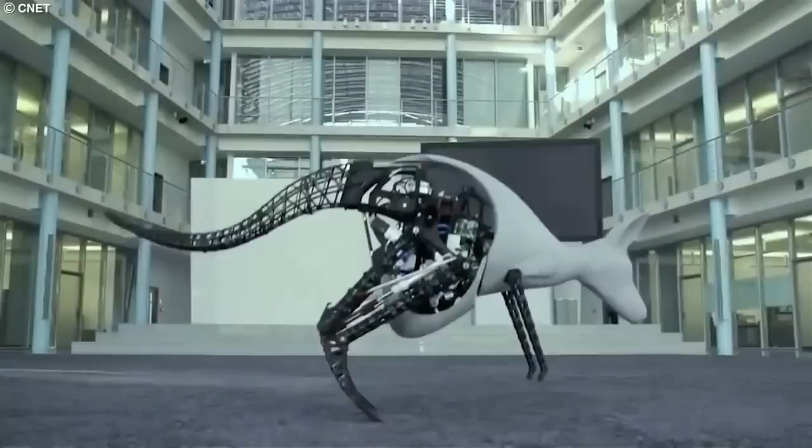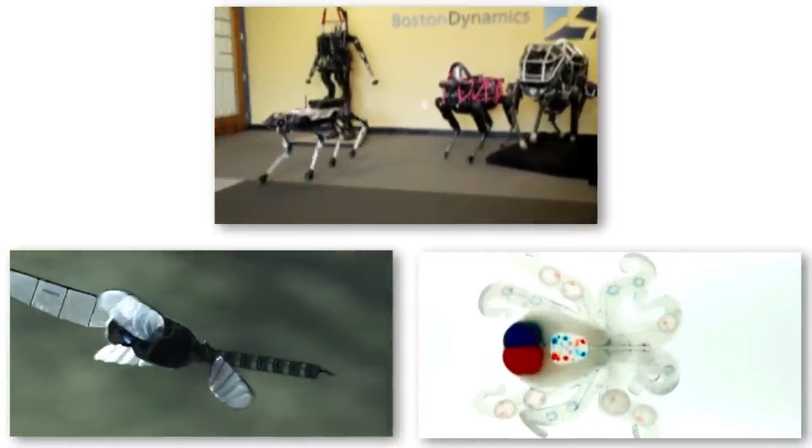This bionic wheelbot is not only able to exhibit unique movements, it's likewise able to adapt perfectly to just about any environment and traverse even the toughest of terrains. But it's this robotic spy crab that's fast revolutionizing how we study animal behaviors, as well as taking our understanding of these crustaceans to unprecedented levels.

In this video, we've detailed 20 amazing robot animals that will absolutely blow your mind.

Number 20: Robot Dolphin. Now, just imagine walking into SeaWorld and being greeted by not only live animals, but by a pod of incredibly realistic robotic dolphins, jumping and flipping through the air just like their real counterparts.

And while this may seem like a futuristic fantasy, the truth is, it could soon become a reality thanks to the incredible works of Edge Innovations. These robots are not only a substitute for their live counterparts, they're also a technological marvel and are already revolutionizing the way that we think about live animal shows and marine conservation.

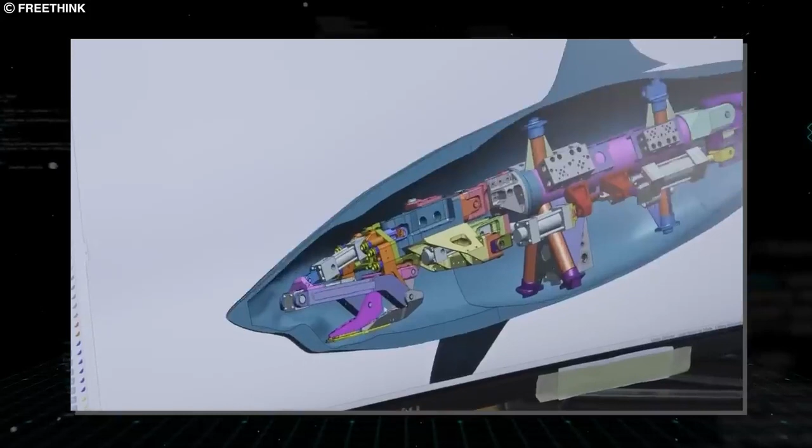Using their advanced AI, sensors, and programming, they're able to learn and adapt to their environment, interact with humans, and even respond to commands. The illusion of a live dolphin and the ability to interact with it.

These robotic dolphins from Edge Innovations are so advanced that they can mimic the behaviors and movements of real dolphins with stunning accuracy. And with over 3,000 live dolphins currently held in captivity for entertainment purposes, this company hopes that their robots will help to reduce the practice of keeping wild animals in captivity.

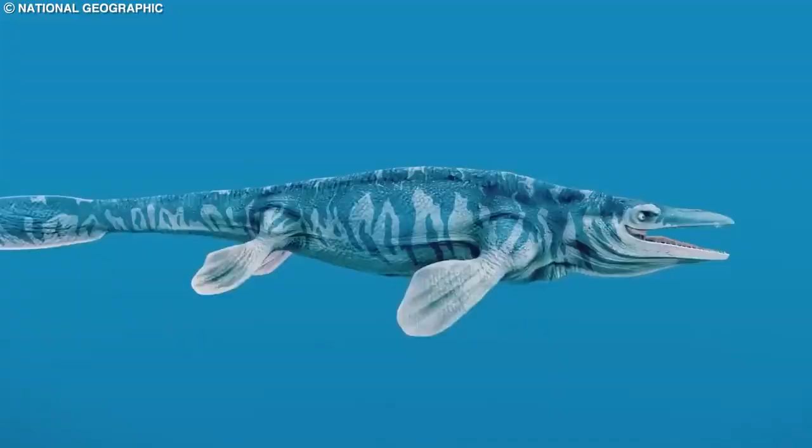In addition to these dolphins, the company has said that swimmers will likewise be able to dive with great robotic white sharks and even Jurassic-era reptiles from the sea from millions of years ago in the near future.

Number 19: Robotic biohybrid zebrafish. The idea of a robotic fish paving the way to an artificial heart may seem like science fiction, but in the world of cutting-edge medical research, anything can be possible.

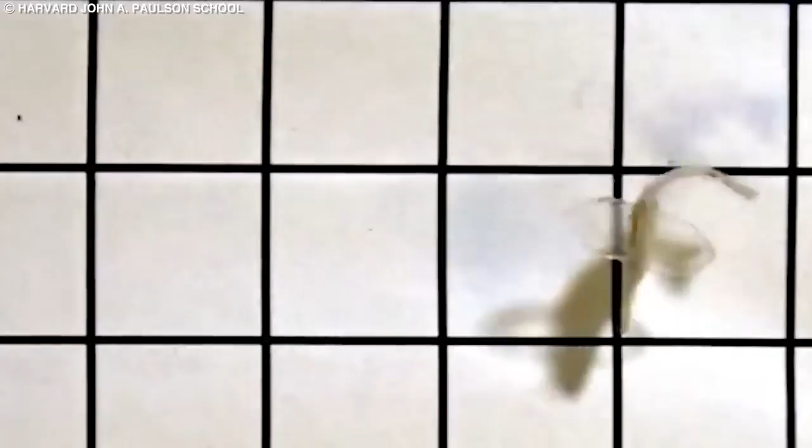A team of experts at Harvard is pushing the boundaries of what we thought was possible, turning to a surprising source of inspiration, that being the humble zebrafish. Fish have always been known for their agility and grace in the water, but it's the mechanics of their tail that has captured the attention of scientists.

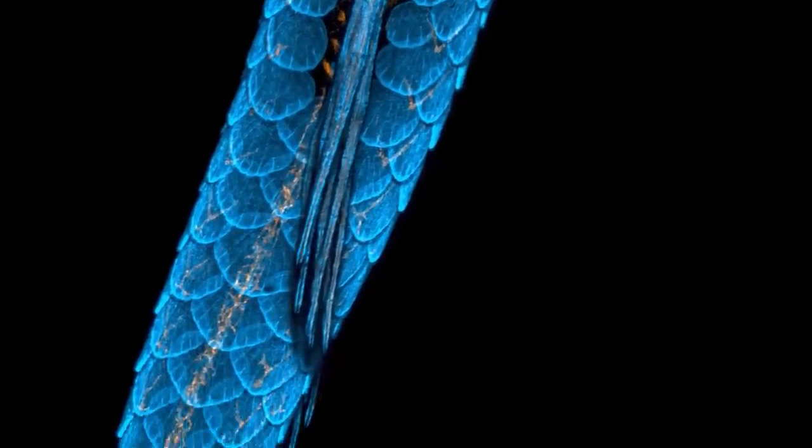By studying the way that fish move through the water, the researchers have discovered that there are some striking similarities between the way that fish swim and the way the human heart functions.

To put their theory to the test, the scientists have created a biohybrid zebrafish using a combination of paper, gelatin, and human cardiac cells. And remarkably, when these tiny robotic fish are then placed in a nutrient-rich liquid environment, they're able to swim continuously for over 100 days.

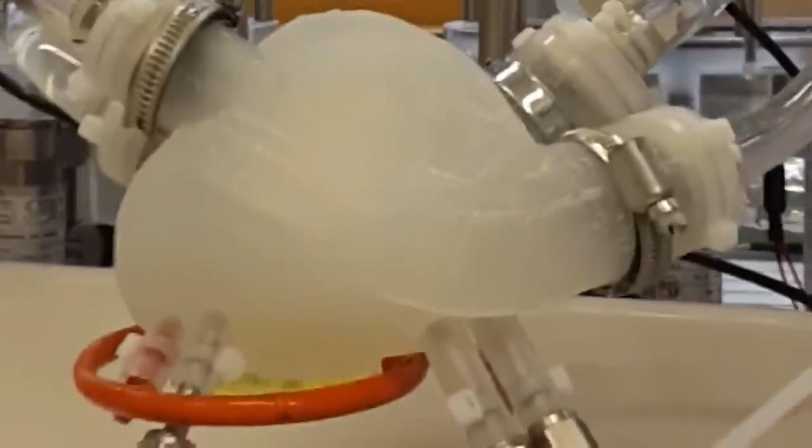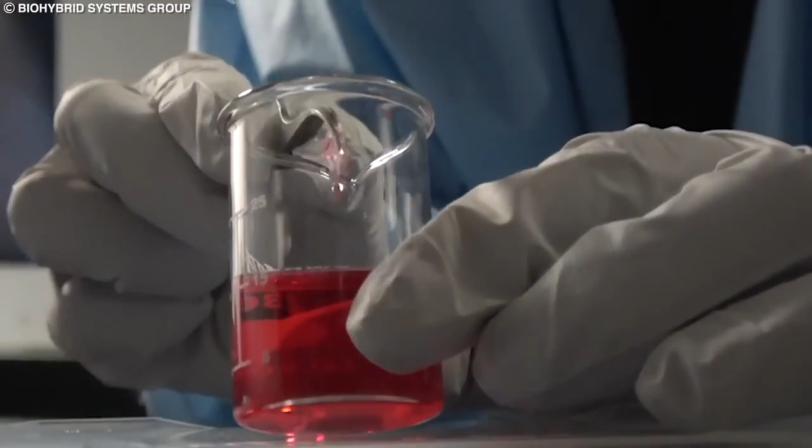While there's still much work to be done before an artificial heart becomes a reality, the research being conducted at Harvard has been widely considered a promising step forward. The biohybrid zebrafish is yet another instance of AI and robotics playing a crucial role in finding a lasting solution to a pertinent human problem.

Number 18: Crab Microbot. Nature's fondness for crabs has puzzled scientists for many years. While the reason behind it is still unknown, some experts speculate that the unique shape of crabs provides them with a wide range of benefits.

So, taking inspiration from nature and by the crab's unique features, an international team of scientists has developed tiny robots that move like crabs. These sub-millimeter robots are made from a material that can be programmed to remember its original shape and deform in response to light.

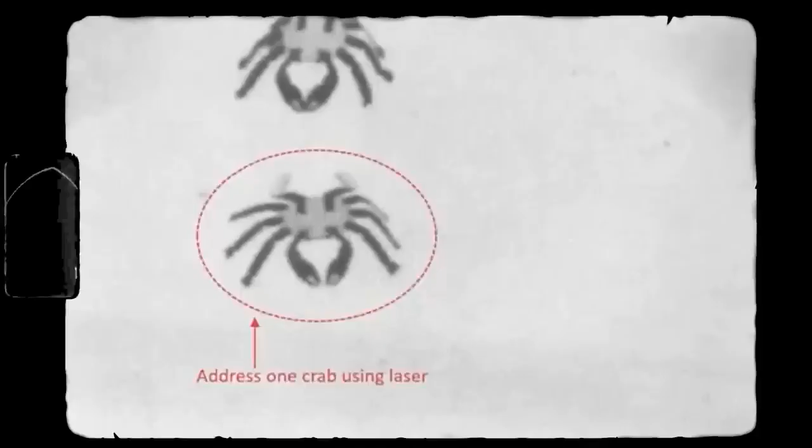By shining a laser on the robots, the material relaxes and then deforms, causing the robot to move in a crab-like motion. But these microbots are not only for show, they have the potential to revolutionize medicine with their ability to navigate through the body and deliver targeted treatments.

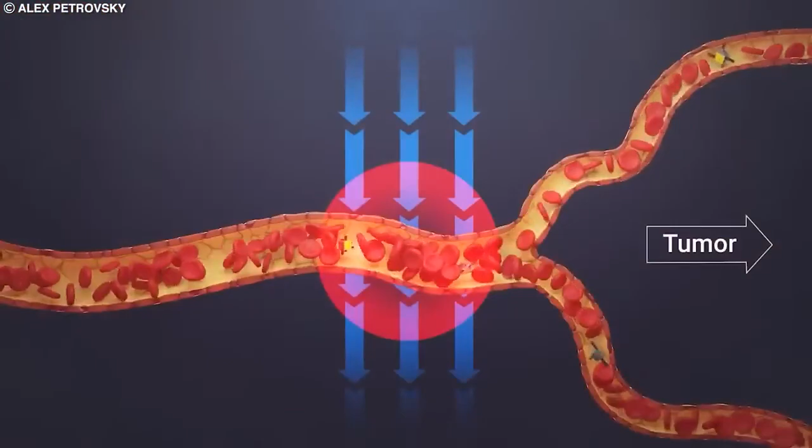Just imagine a swarm of tiny crab-like robots all working together to remove cancer cells or repair damaged tissues inside the body. This tiny crab microbot is fast revolutionizing the field of biomimicry, the practice of imitating nature to solve human problems, and the endless possibilities that come with studying and learning from the natural world.

Who knows what other secrets nature may have in store for us? The possibilities are endless, and the future is full of promise.

Number 17: Cyborg Ray. Meet the incredible cyborg creation, a stingray powered by a rat's heart, but designed to move like a real-life stingray. It's unlike anything else that you've ever seen before.

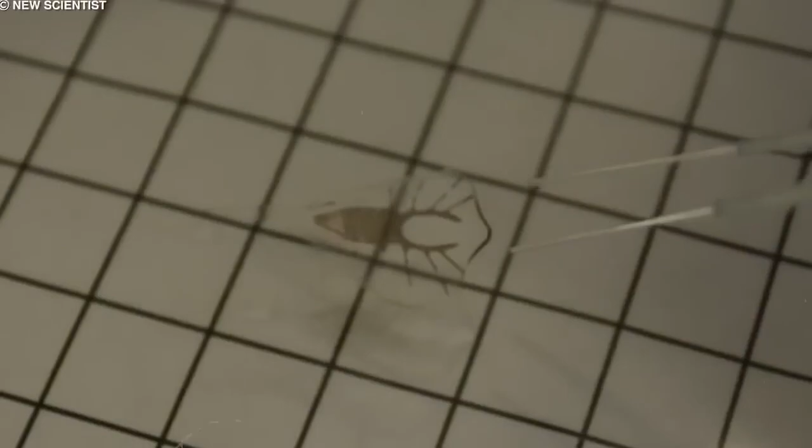This cutting-edge technology uses genetically engineered muscle cells that respond to light cues to help propel the stingray's body throughout the water, mimicking the movement of a real stingray.

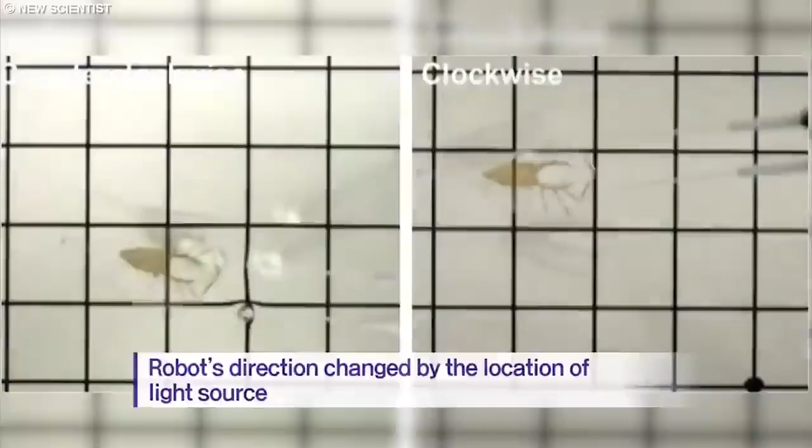The stingray's unique gold skeleton stores energy and moves the fins upward depending upon the pulses and frequency of the light show, giving its controller complete access over the direction and speed of the creature.

This cyborg creation has become yet another remarkable example of how technology can blend with biology in order to create something truly extraordinary. However, this ray is not only a technological feat, it also has the potential to revolutionize medical science.

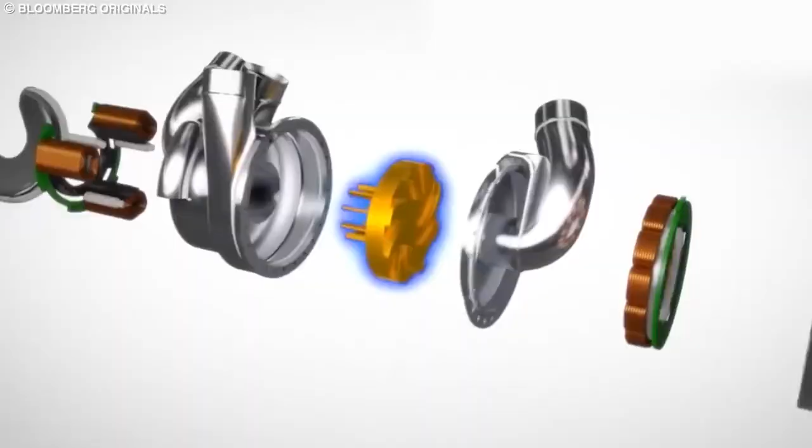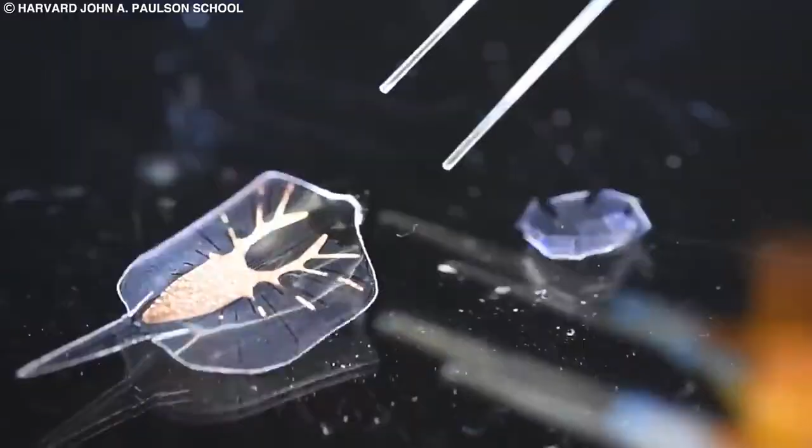By studying how heart muscles move in the stingray, scientists can learn more about how to create synthetic pumps for humans using a hybrid of organic and mechanical elements. This little stingray could be the key to making life-saving medical advancements, the likes of which we could never before imagine. The stingray is a biological life form in some ways, a machine in others. It cannot reproduce, but it's undoubtedly alive, perfectly balancing its organic and man-made matter in one.

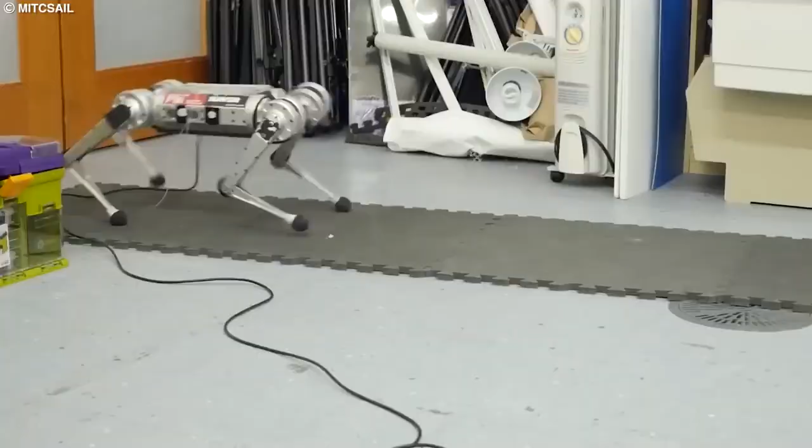Number 16, Mini Cheetah Robot. This is the newest addition to the MIT family, an incredible, agile, and versatile four-legged robot that can do backflips and run with ease.

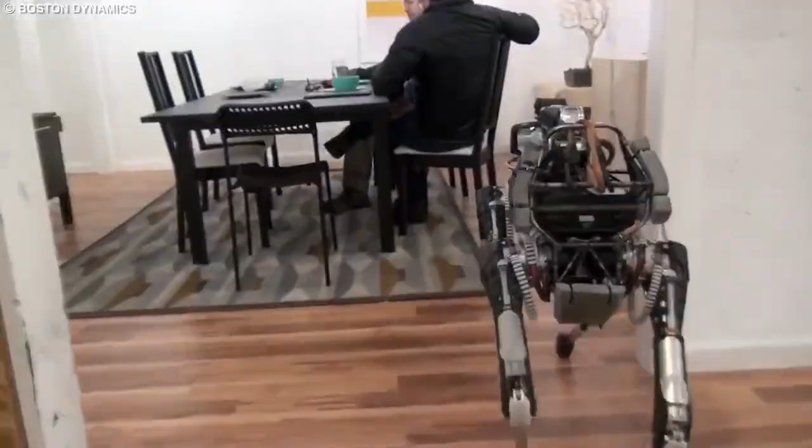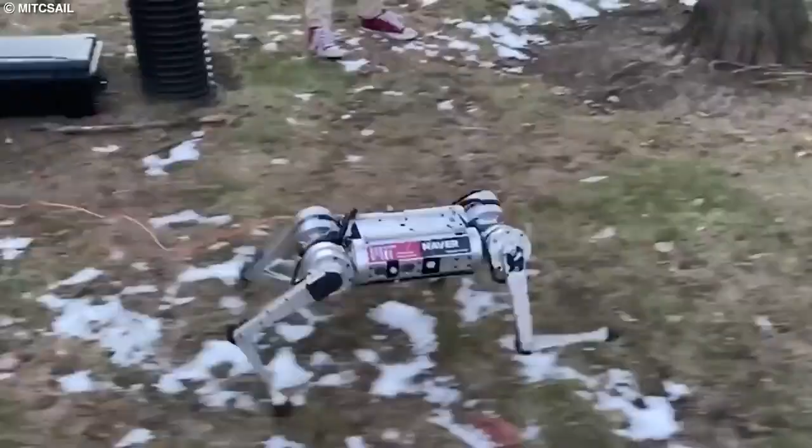While it may look similar to the company's famous robot dog Spot, this robot has been specifically designed for a unique research purpose and was developed in collaboration with DARPA. One of the key features of this robot is its robust frame and body, which are built to withstand rigorous testing and experimentation without the fear of damage or breaking. The powerful actuators allow researchers to test controllers and perform experiments with ease, making it an invaluable tool for studying movement and robotics.

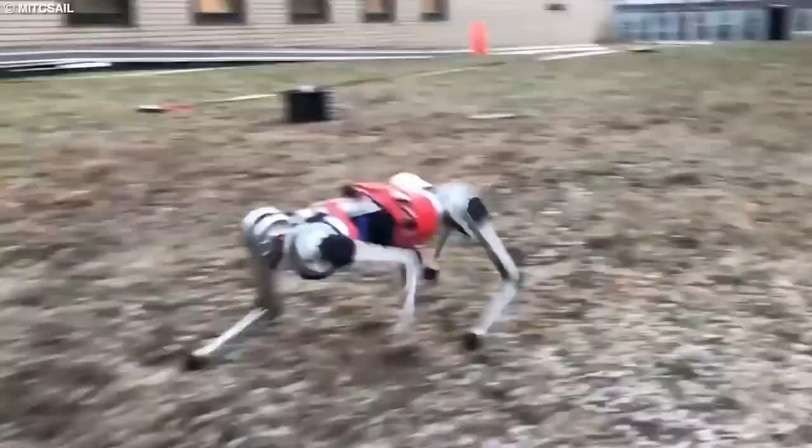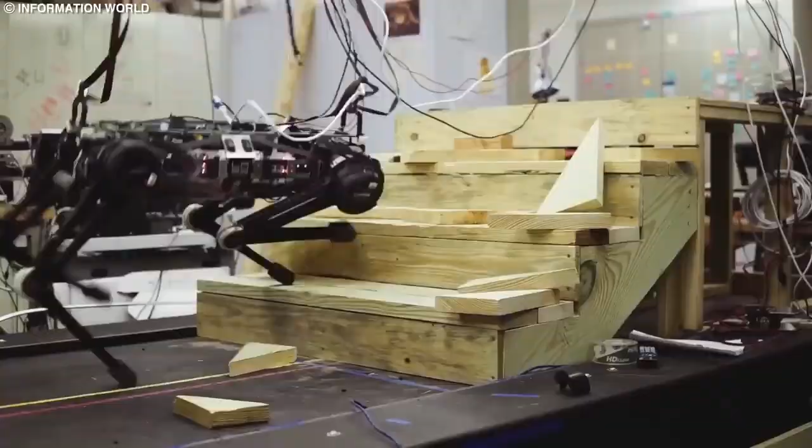What really sets this robot apart is its unparalleled strength and durability. It can navigate environments with ease and grace, whether it's running on grass or ice. Its movements are incredibly fluid and natural, which makes it a valuable asset for researchers studying locomotion and biomechanics. This robot is the perfect example of how technology and robotics can be used to advance our understanding of the world around us. With its impressive capabilities and versatility, it's sure to be a valuable tool for researchers and scientists for many years to come.

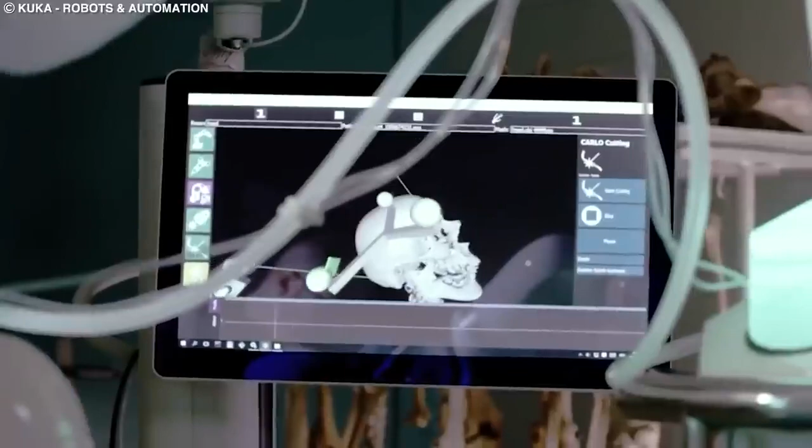Number 15, Magnetic Tentacle Robot. The idea of using machines to explore the human body without having to cut it open has always been an alluring one, captivating the imagination of scientists for decades. However, developing such technology has been a significant challenge, as the devices need to be small, flexible, and yet powerful enough to navigate through the complex structure of the body's internal organs.

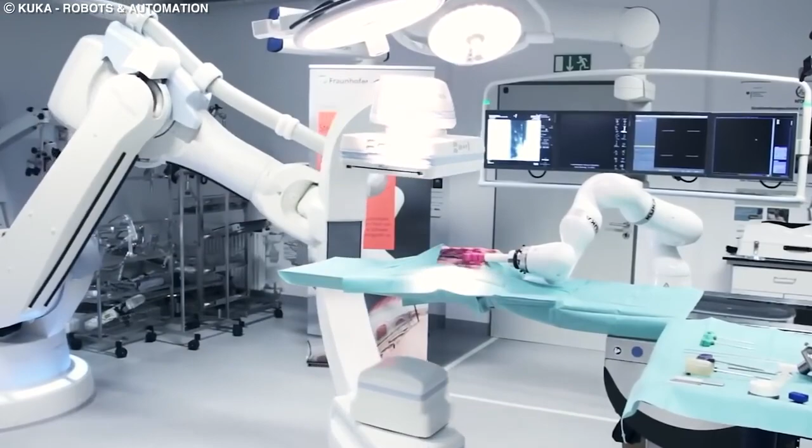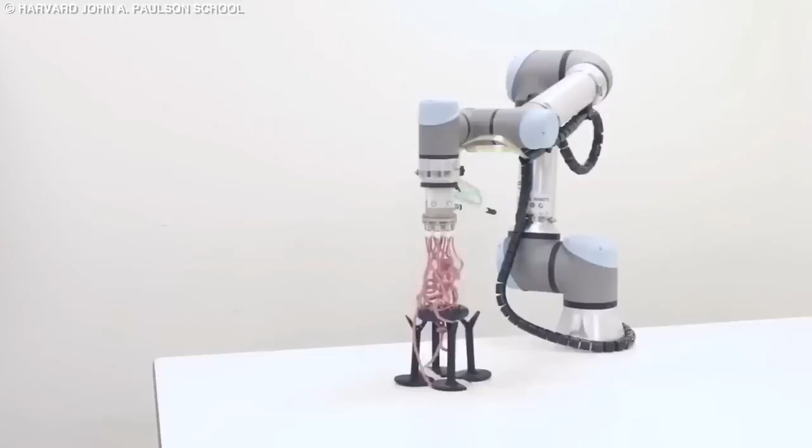To overcome these challenges of accessing the intricate internal organs of our body, especially the lungs, scientists from the University of Leeds have once again turned to nature for inspiration. This time, they've carefully examined how tentacled animals, such as the octopus, navigate narrow spaces, resulting in a groundbreaking robot called the Magnetic Tentacle Robot, which perfectly mimics the tentacles of these animals. This novel invention uses a rubbery elastomer that is flexible and maneuverable, with magnetic particles that can be controlled via an external magnetic controlling device.

This way, the robot can make its way deep into the lungs or any other body part without being manually manipulated by a surgeon. Once inside the body, the tentacle's movements are entirely autonomous, as it follows a predetermined plan to navigate through the lung's complex structure. The potential for this technology is vast, and it could revolutionize the field of medicine in the years to come.

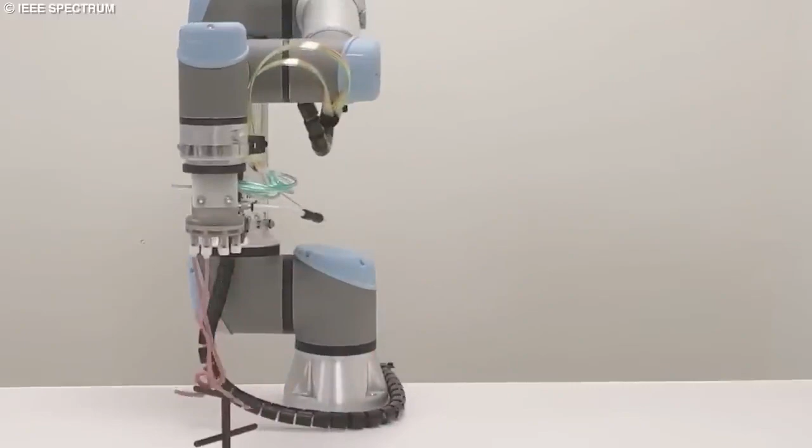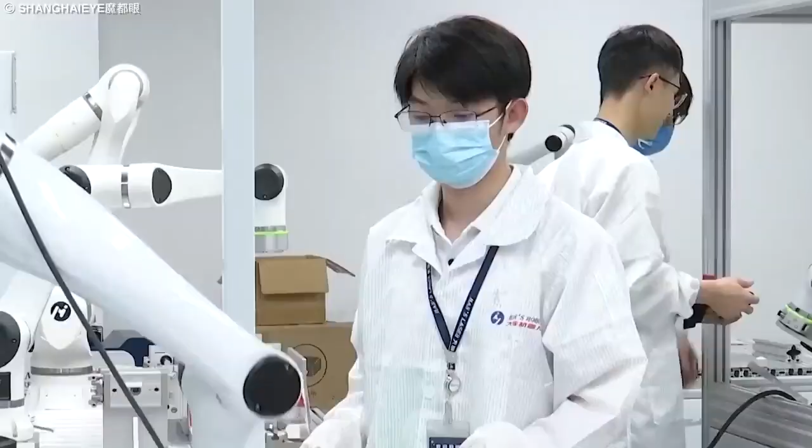Number 14, Shanghai Robotic Shark. This robotic shark was created by researchers at China's Aerospace Science and Industry Corporation, and it's a fascinating sight to behold. Since its debut at the Shanghai Haichang Ocean Park, visitors have been flocking to witness this incredible feat of engineering. The shark's lifelike movements and accurate depiction of a real shark's physical features have made it a must-see attraction for those interested in aquatic life.

Despite its impressive size of 4.7 meters, the robotic shark can move at a speed of 42 meters per minute, making it almost as fast as some of its biological counterparts. It's powered by a lithium battery, which allows it to swim, turn, float, and dive just like a real shark would, and the robot's mouth and gills can open and close, providing a realistic simulation of a real shark's breathing and feeding processes. The researchers behind the project have plans to develop more robotic aquatic animals based on feedback from the public and experts.

These robotic aquatic animals will be used for hydrological survey, environmental inspection, and underwater photography, giving researchers a unique perspective on underwater life. As it stands, one undeniable fact is that as more of these biomimetic robot fish are developed and refined, they'll greatly revolutionize how we study and understand underwater life.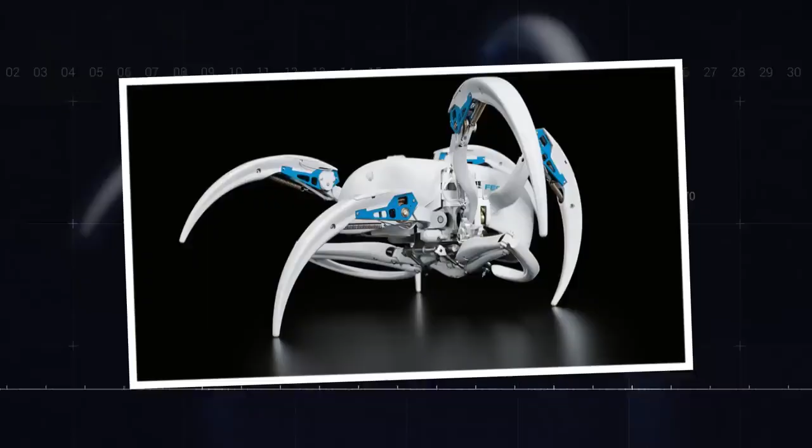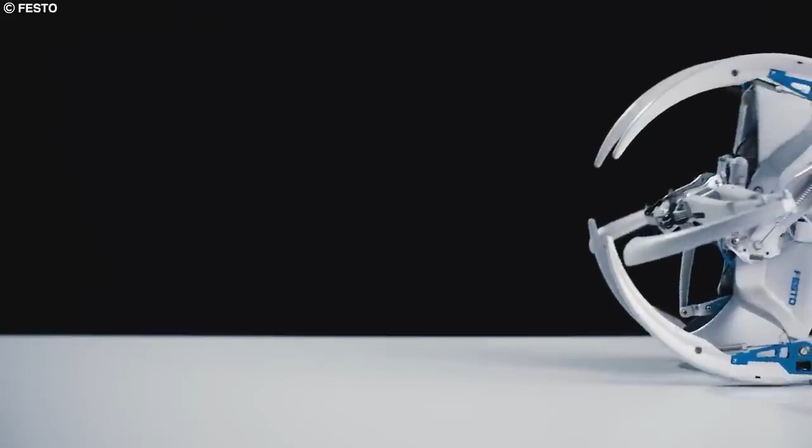Number 13, Bionic Wheelbot. The Bionic Wheelbot is a mind-blowing marvel of engineering. This unique robot takes inspiration from the incredible flick-flack spider, known for its unique cartwheeling movements. This movement pattern allows it to move quickly and efficiently across varied terrain. By mimicking this movement, the Bionic Wheelbot is able to adapt to its environment in such a way that no other robot has been able to before.

Festo, the company behind the Bionic Wheelbot, is no stranger to innovative design. They have long been at the forefront of bionic learning, exploring new ways to incorporate the natural world into their designs. The Bionic Wheelbot is just the latest in a long line of incredible creations.

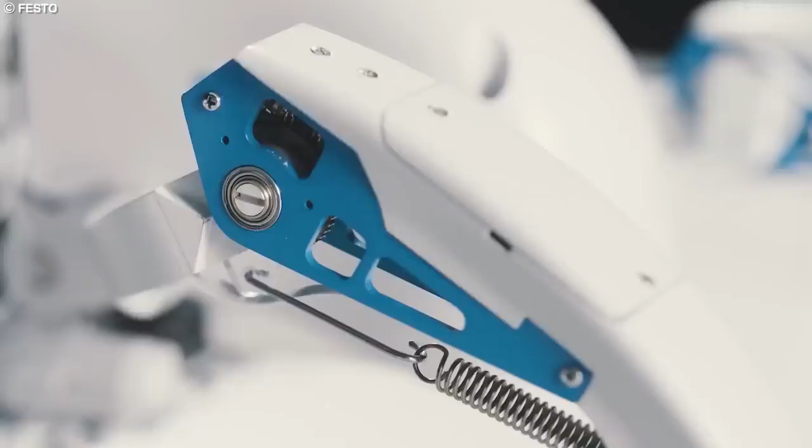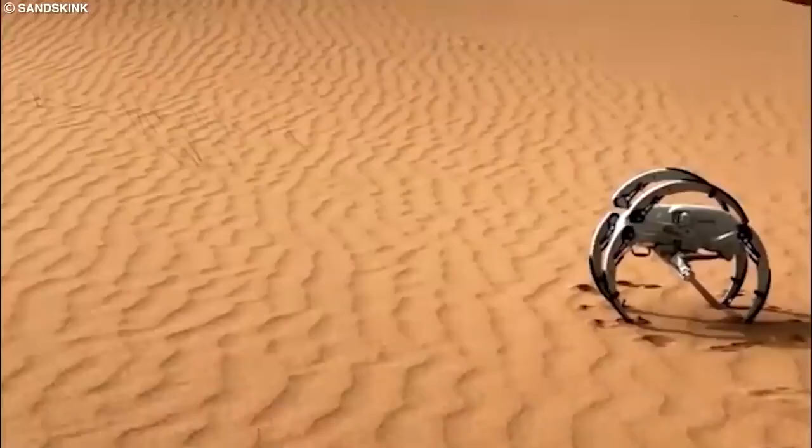One of the most impressive things about the Bionic Wheelbot is its ability to switch seamlessly between rolling and walking. This makes it incredibly versatile and able to navigate everything from smooth and level surfaces to rocky and uneven terrain. Because it can move with such ease, it can also go places that many other robots simply cannot.

The Bionic Wheelbot's design is incredibly resilient. It features a sturdy frame and advanced sensors, which allow it to withstand even the most challenging climbs, making it an ideal choice for exploring rugged environments like mountains and deserts.

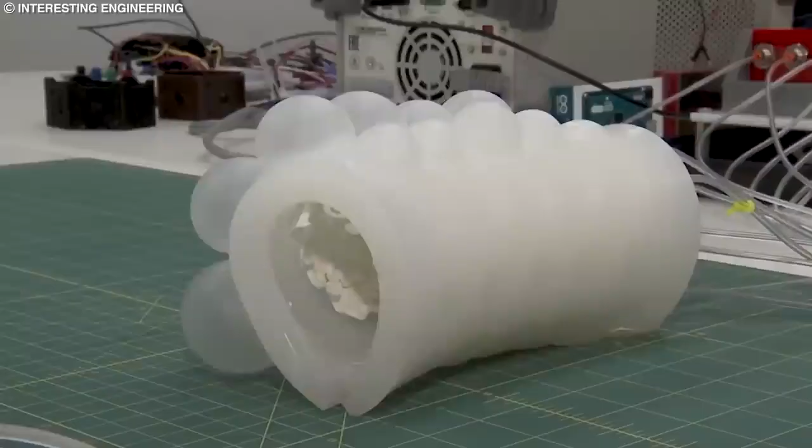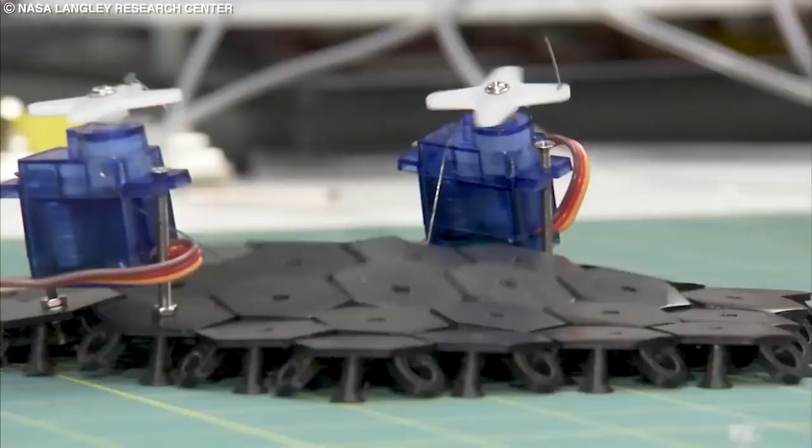Number 12: Soft Octobot. Robotic cephalopods are the future of robotics and can potentially revolutionize the field. Although the first Octobot was developed in 2016, the technology behind robotic cephalopods has now undergone great advancements. These robots can now not only navigate tight spaces, but also change their shape and configuration as needed.

Just like a real octopus, their soft and boneless bodies allow them to move and contort in ways that rigid animals cannot. They can squeeze through small openings, wrap themselves around objects, and even change their skin color and texture to blend in with their surroundings.

The potential applications for soft robots are numerous. For example, a soft robot could navigate through rubble and debris in search and rescue operations to locate survivors. They could also explore underwater environments where hard-bodied robots might be too bulky and inflexible to maneuver effectively.

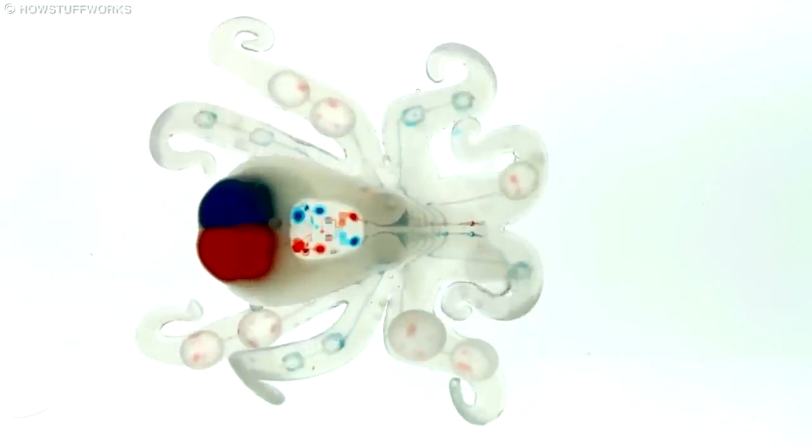The underlying technology behind the improved versions of soft robots is likewise fascinating. The microfluidic logic circuit inside the robot is a breakthrough in fluid dynamics. This circuit works like a circuit board, directing pressure to different parts of the robot as needed. The chemical reaction inside the robot that changes hydrogen peroxide into gas is another technological marvel.

As scientists continue to develop and refine this technology, we may see more and more applications for soft robots in various fields, from medicine to construction, and perhaps even space exploration.

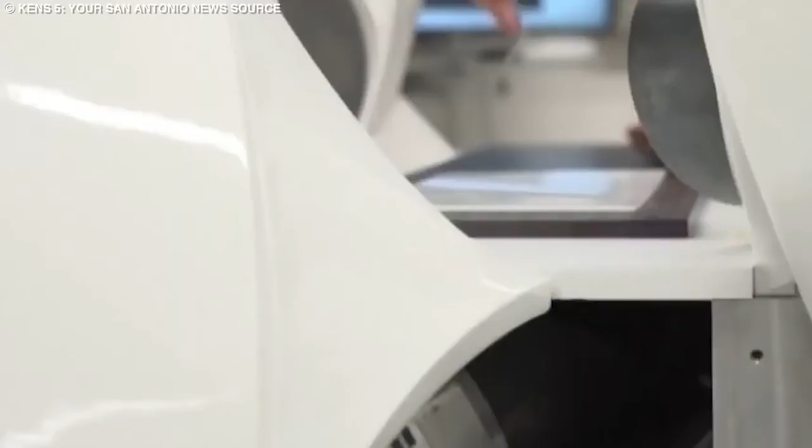Number 11: Robotic Millipede. This tiny robotic millipede, created by researchers in Hong Kong, is a revolutionary innovation that is set to change the way drugs are administered into the body.

Unlike traditional methods that can be invasive and painful, this little soft caterpillar-like robot can navigate through the body with ease and precision. The robot's design is based on the leg structures of hundreds of ground animals, and its legs have a perfect length and gap ratio of 1:1.

This design allows the robot to experience 40 times less friction than a limbless robot in both wet and dry environments. This also makes it extremely efficient and allows it to move through the body effortlessly.

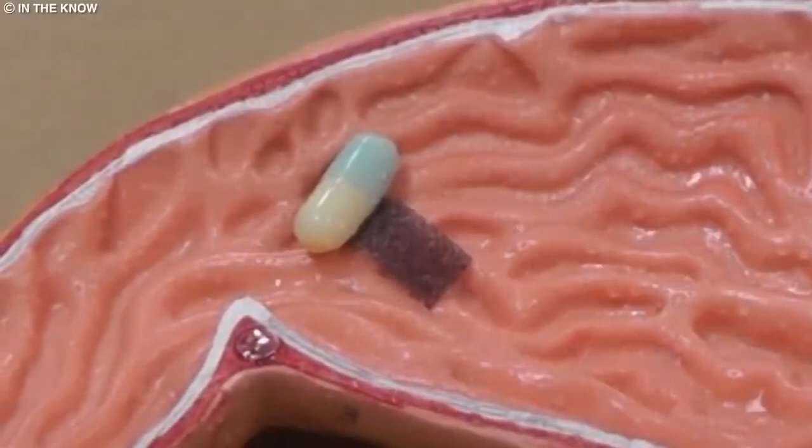What's more, this robot can be remotely controlled using electromagnetic force, meaning doctors can guide it to specific locations within the body, such as a tumor, and administer drugs directly to the affected area.

This not only makes drug administration more precise, but also reduces the risk of side effects associated with traditional methods. While the thought of a robot crawling around in your body may seem a bit unsettling, the benefits of this innovation are hard to ignore.

The robot millipede can revitalize drug administration, making it more efficient, precise, and less invasive.

Number 10: Robot Dragonfly. Inspired by the complex flight capabilities of dragonflies, this small ultralight UAV, developed by Festo, is far more advanced than your usual drone.

While most drones can only fly in one direction, the Dragonfly robot is capable of flying in any direction, even backwards. It also has incredible turning acceleration as well as hover and gliding capabilities, but what's even more stellar is that it can achieve all of this without having to beat its wings.

The Dragonfly robot from Festo is likewise the first aircraft to combine the flight capabilities of a helicopter, a plane, and a glider all in one.

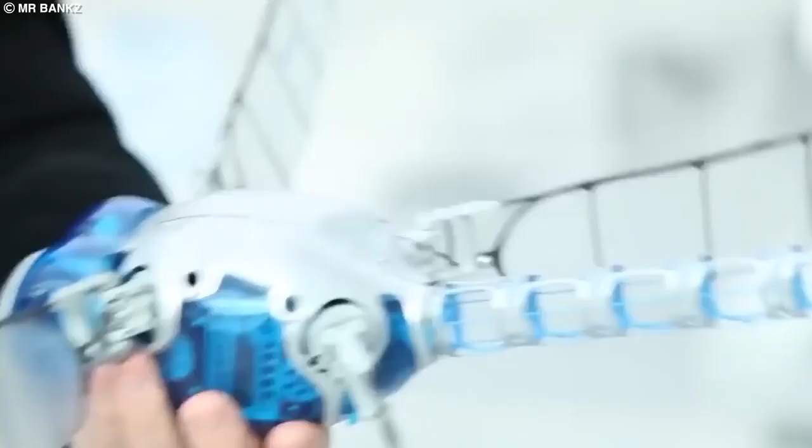The company hopes that by better understanding the flight strategies of dragonflies, they can apply these principles to solve many engineering problems within the industrial world.

One of the most impressive features of this amazing robot animal is its real-time communication abilities. It's remote-controlled and is capable of continuously exchanging information and evaluating multiple sensor inputs to identify complex events and critical states. This level of communication and evaluation is something that has never been seen before in the world of drones.

This robot is a testament to Festo's commitment to creating and innovating in equal measure, and Festo is sure to continue pushing the boundaries of what is possible with their Dragonfly-inspired technology.

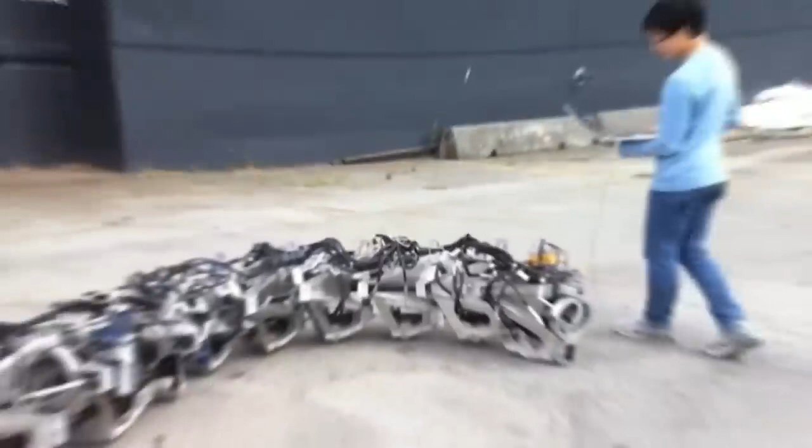Number 9: Spacebok. Dogs may have paved the way for space exploration, but now their robotic counterparts are taking center stage. While we've sent countless machines into space, from probes to rovers, the development of animal-inspired robots offers a unique opportunity to explore other worlds more efficiently and safely than ever before.

One such robot is the quadrupedal Spacebok, created by a team of students from ETH Zurich and ZHAW Zurich. Modeled after the movements of animals on Earth, the Spacebok is designed to use dynamic gaits, which allow all four of its limbs to leave the ground, making it better suited to navigate low-gravity environments like the Moon or Mars.

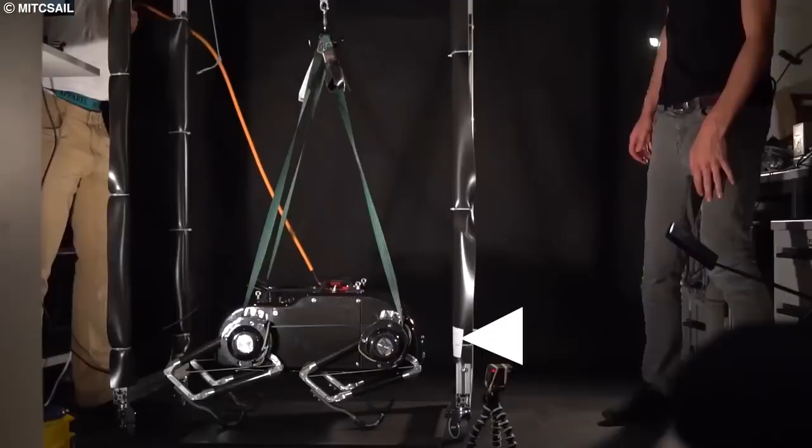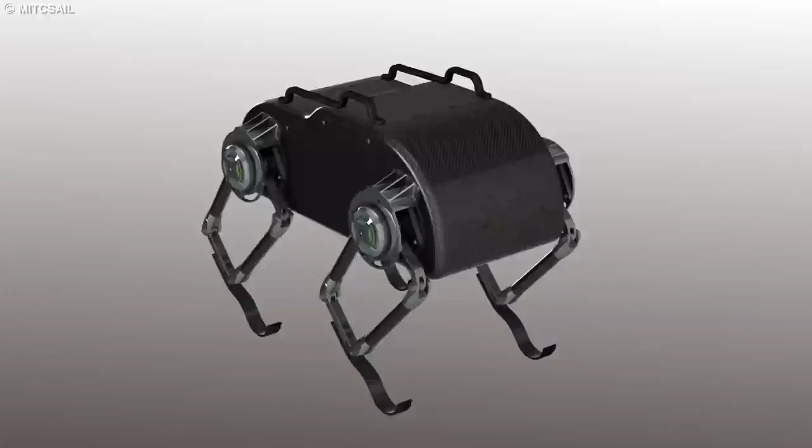Of course, designing and programming such a robot is no easy feat. Engineers had to take into account not only the unique challenges of space exploration, but also the intricacies of animal movement. It would not be until recently that the technology existed to replicate these dynamic gaits in robots, making Spacebok's development a groundbreaking achievement in the field of robotics.

As we look to the future of space exploration, robots like the Spacebok may become an essential tool in our efforts to explore and understand the universe. Spacebok represents the next generation of space exploration and a new era of scientific discovery.

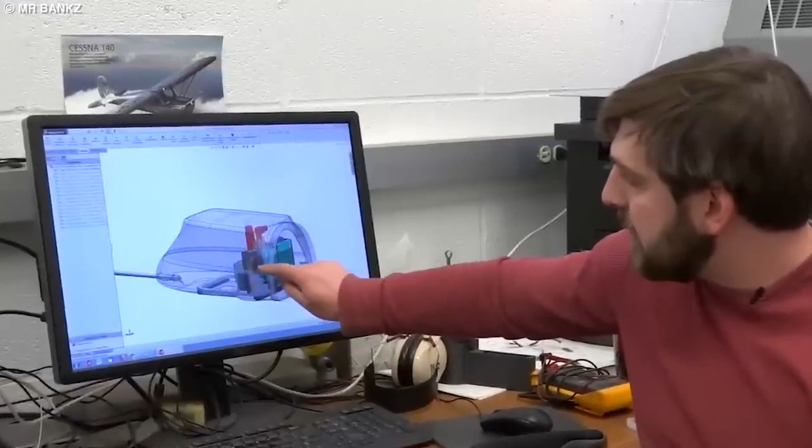Number 8. Spider Necrobots. Scientists at Rice University have taken robotics to a whole new level by using dead spiders as the basis for a new type of robot gripper. While the concept may seem a bit creepy, their process of creating these robots is actually fascinating.

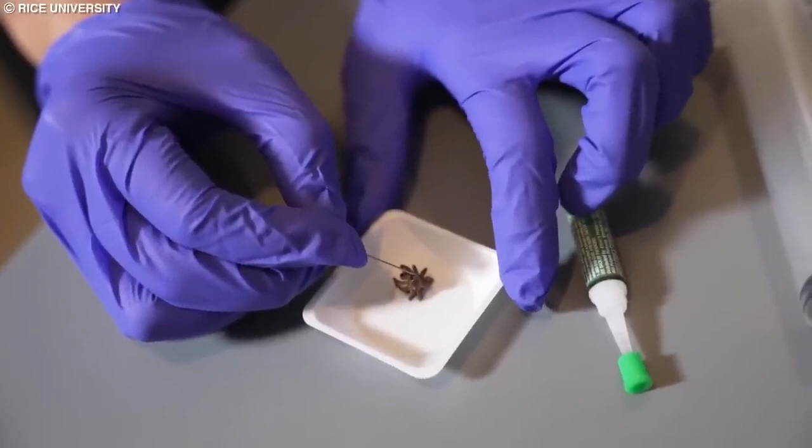By using the natural hydraulic system found in living spiders, the researchers were able to create a unique and efficient way to manipulate objects. The team inserted a syringe into the spider's body cavity and then injected it with a small amount of air, which created a new hydraulic system, allowing the legs to extend and contract. This process gave the dead spider a second life, albeit in robotic form, and the resulting robot grippers could grasp fragile objects with a surprising level of dexterity.

The researchers envision a range of applications for their necrobotic grippers, which includes the collection and transport of biological samples from remote or dangerous areas. The team believes that the natural gripping ability of spiders, combined with the unique hydraulic system they've created, makes these robots ideal for handling delicate materials.

Overall, this robotic creation is yet another demonstration of the incredible potential of biomimicry in robots, and also highlights the fascinating ways in which scientists are pushing boundaries in this interesting field.

Number 7. Robot Eel. The robotic eel has been described as a technology that's ahead of its time by many experts. This robot is designed to perfectly navigate through the most treacherous and contaminated of waters. Its sleek and streamlined body is capable of moving effortlessly through currents, propelled by a powerful yet silent motor.

Equipped with an array of sensors and testing equipment, the robotic eel is capable of analyzing even the smallest water sections to detect sources of pollution. Its sophisticated technology can pick up on the most minute changes in water quality, enabling it to pinpoint the exact location of contaminants. The development of this groundbreaking technology was the result of the collaboration of a diverse group of experts, which included engineers, biologists, and chemists.

Together, they worked tirelessly to create a robot that could contribute to environmental conservation efforts and bring about positive change in the world. The robot can be controlled remotely, allowing operators to direct its movements and ensure that it reaches its target destination. Alternatively, the robotic eel can operate autonomously, freely exploring the waterways and sending data back in real time.

The robotic eel is also incredibly environmentally friendly and does not contribute to pollution in any kind of way. The robot now represents a significant step forward in the fight against water pollution on a global scale.

Number 6. Robotic Spy Crab. As the sun rises over the pristine beaches of Christmas Island, the spy crab mimics the behavior of its crab counterparts. At times, the spy crab must navigate treacherous terrain, dodging vehicles and other obstacles, as it plays a crab version of the classic video game Frogger, leaving us all submerged in the extraordinary world of these fascinating creatures.

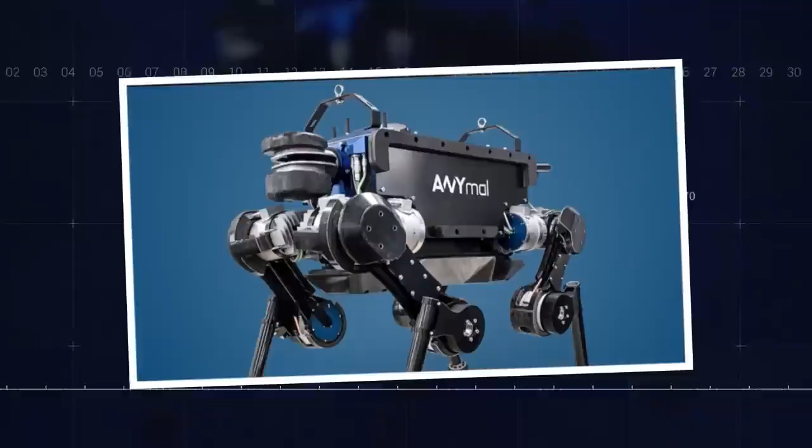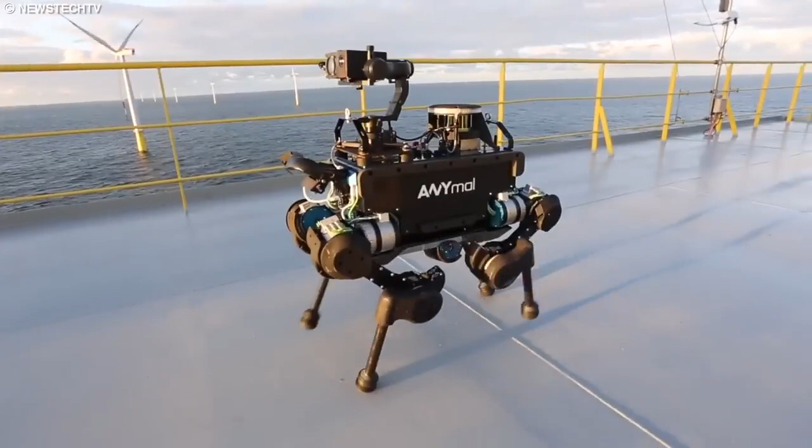Number 5. ANYmal. In 2009, a group of brilliant engineers at the Robotic Systems Lab of ETH Zurich embarked upon a monumental task, creating a four-legged robot that could traverse harsh environments without human intervention. Fast forward to the present day, and the result of their tireless efforts is awe-inspiring. It's the ANYmal, a robot that has surpassed all expectation.

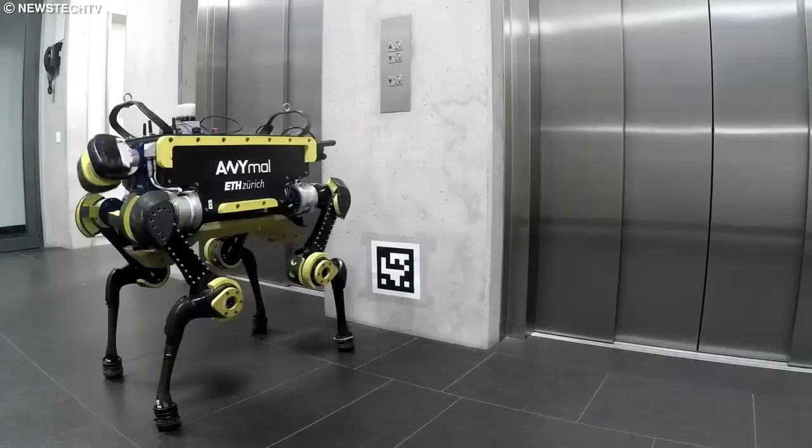With a sleek design and an impressive skill set, ANYmal is capable of running at breakneck speeds, conquering steep inclines, and even pressing elevator buttons with ease. But what really sets it apart from other robots is its advanced sensory system. Equipped with laser sensors and cameras, the robot can continuously create a highly detailed map of its surroundings, which allows it to carefully navigate through even the most treacherous of terrain.

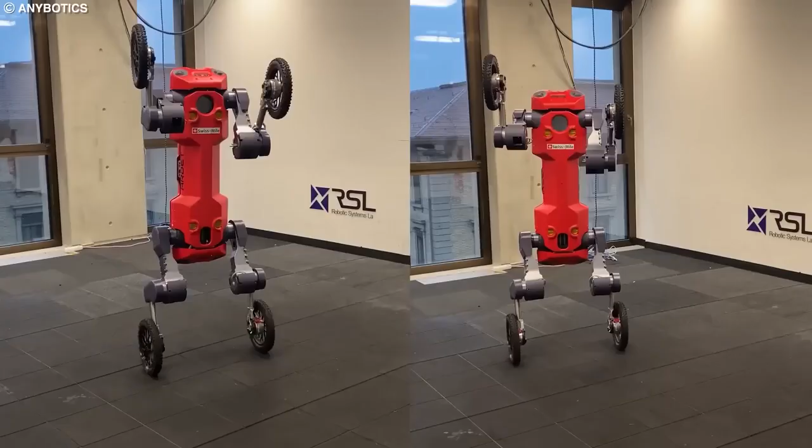Despite weighing in at around 30 kilograms, ANYmal is an incredibly strong machine that can carry a payload of up to 10 kilograms with ease. What's more, on a single battery charge, this remarkable robot can run for an impressive 2 hours.

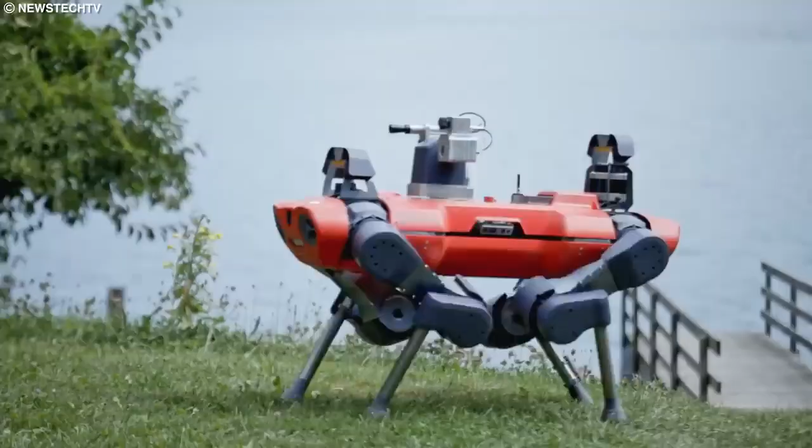Now, it's no wonder that ANYmal has attracted the attention of the world, with the ETH spin-off ANYbotics distributing and further developing this incredible piece of technology. ANYmal is undoubtedly a true marvel of modern engineering, paving the way for a new generation of autonomous robots that can handle even the toughest of challenges imaginable.

Number 4. BionicKangaroo. Festo, the renowned robotics company, never fails to amaze anyone with their animal-inspired creations.

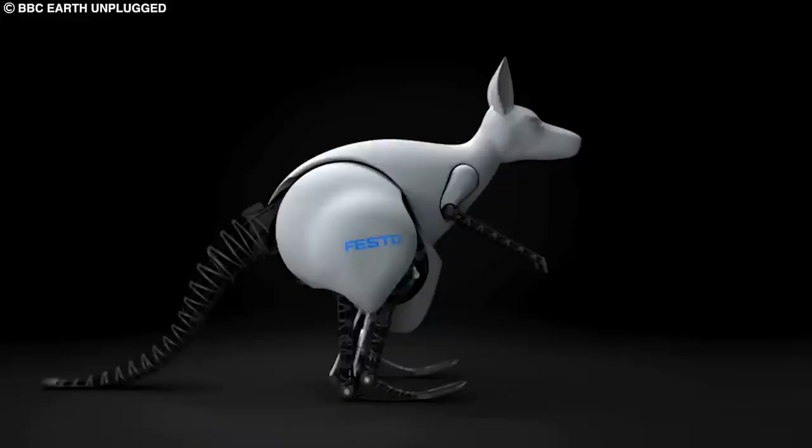The latest addition to the portfolio is the incredible BionicKangaroo, an engineering marvel in every sense of the word. Taking inspiration from the kangaroo's jumping mechanisms, Festo has recreated the animal's unusually long back legs, allowing it to increase its speed without consuming more energy.

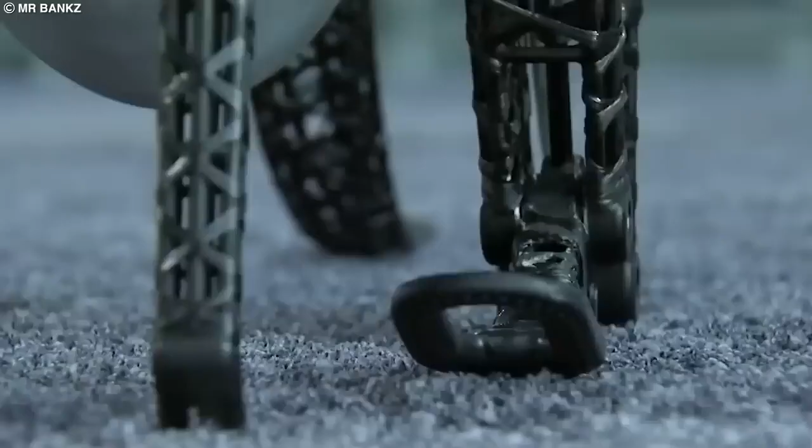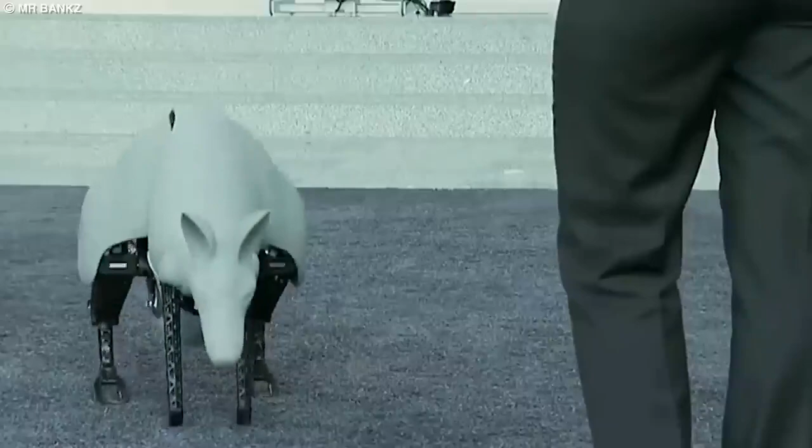In the world of robotics, energy consumption is a major concern. However, with the BionicKangaroo, Festo has found a way to use the power generated by the recreated back legs, which can be recovered, stored, and retrieved. This technology has immense potential in industrial automation, where knowledge about energy recovery and storage plays a massive role. With its ability to generate, store, renew, and regenerate energy, the BionicKangaroo represents a significant breakthrough in robotics and automation.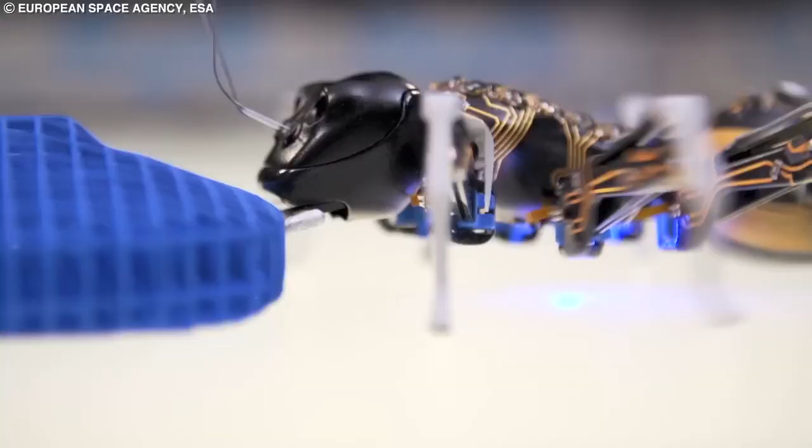Number 3. Bionic Ants. Imagine a world where robotic ants scurry about factories, carrying out tasks with incredible efficiency and precision. These mechanical insects are not only impressive in their ability to communicate and cooperate like their natural counterparts, but they also have an eye for detail and the big picture.

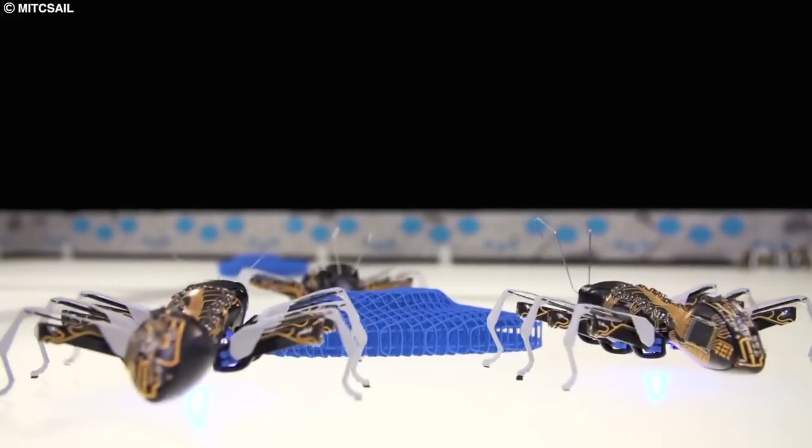Each robotic ant has been designed to mimic the delicate anatomy of a real ant, but with added technological capabilities. The engineers at Festo have incorporated the cooperative behavior of these creatures into their robotic counterparts, creating a world where these incredible little creatures work together seamlessly.

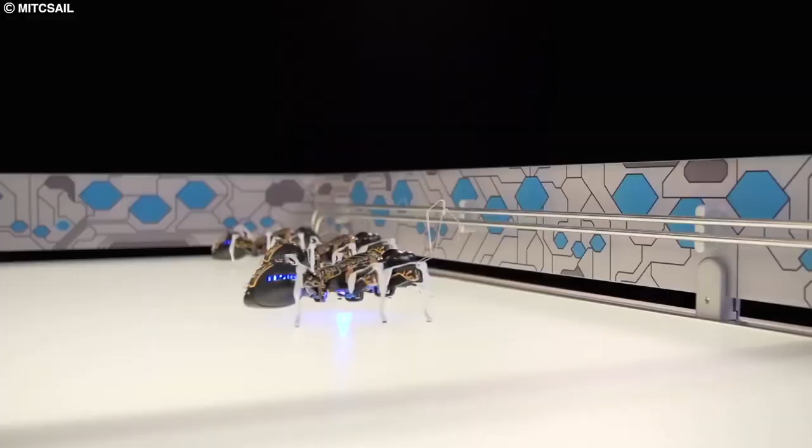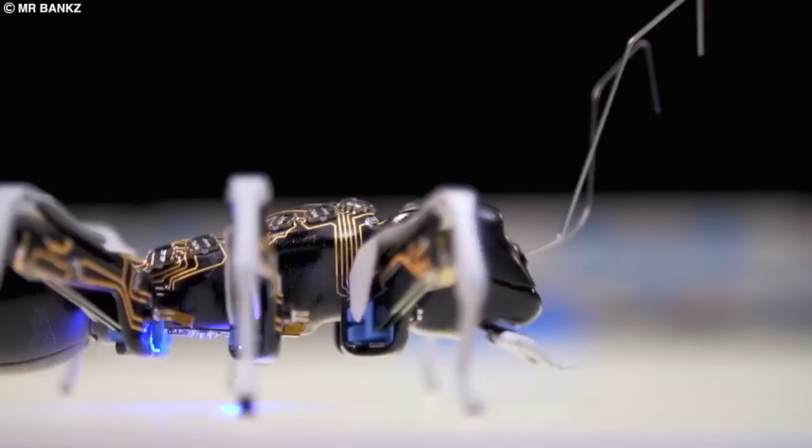Using complex control algorithms, the robotic ants communicate with each other, coordinate their actions and movements, and make autonomous decisions that are always subordinate to the common objective of solving the task at hand. They follow clear rules and guidelines, just like real ants do in their colonies, and the implications of this technological breakthrough are immense.

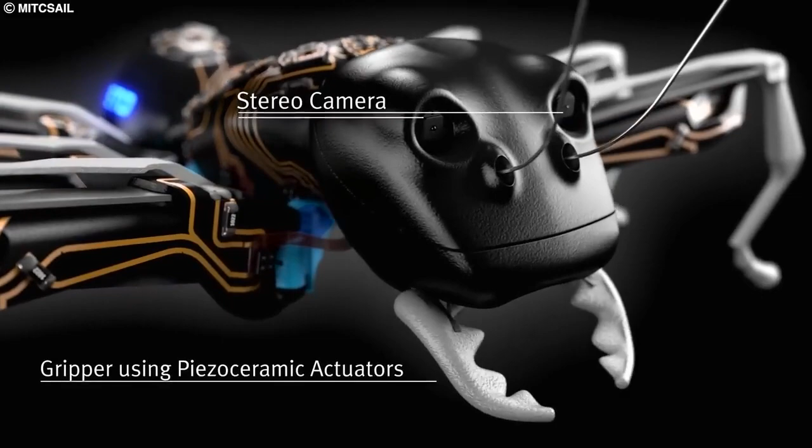Factories of the future could benefit greatly from the efficiency and coordination that robotic ants provide. These tiny machines could be used to carry out complex manufacturing processes, navigate difficult terrain, or even be deployed in search and rescue missions. As we continue to study and develop these robotic ants, we may discover even more ways to harness their incredible abilities. And who knows, we may one day see entire armies of robotic ants working together to solve the world's most pressing issues.

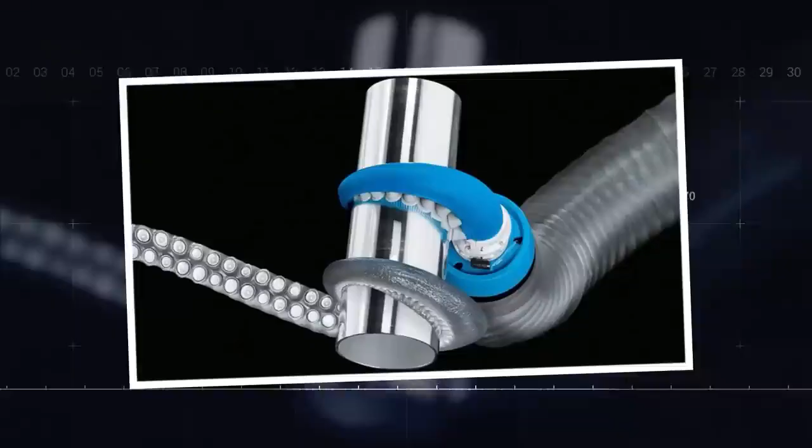Number 2. Octophant. This bionic motion robot is yet another groundbreaking bionic concept created by Festo. Drawing inspiration from the flexibility and dexterity of an elephant's trunk and an octopus's tentacles, this lightweight pneumatic robot boasts an impressive 12 degrees of freedom, allowing it to move in ways that were previously impossible for a robot to do.

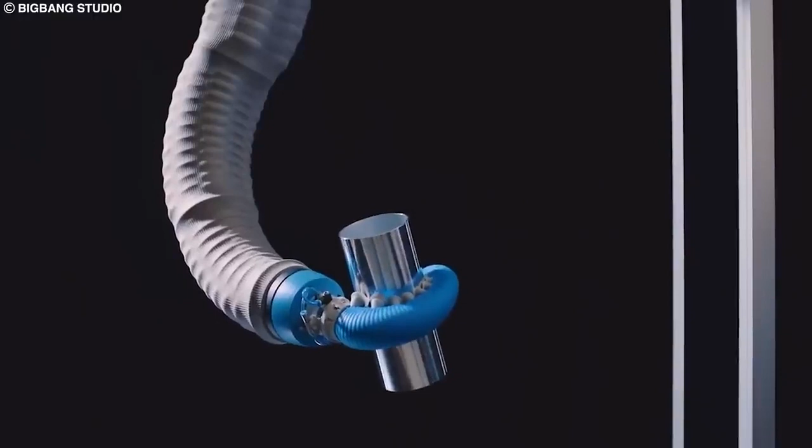This robot is not only agile and powerful, it also has the ability to carry a payload of up to 3 kilograms. Its innovative fiber technology, inspired by the muscle fibers found in an octopus's tentacles, provides the robot with a skin that is both strong and flexible.

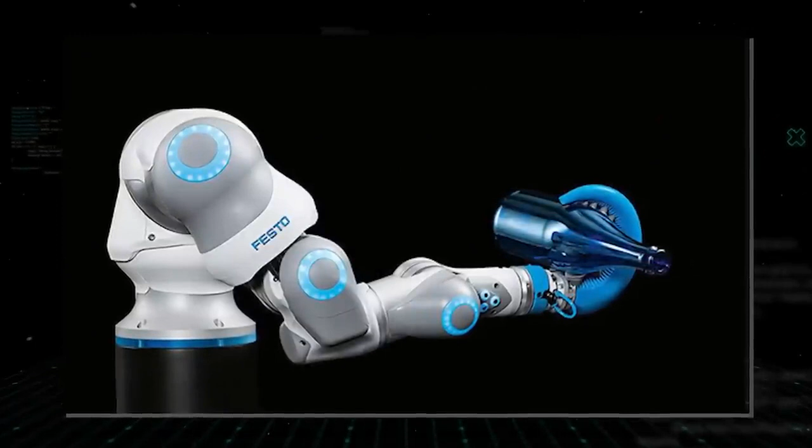This also means the robot can exploit the full power potential of its kinematics, moving in 3 different directions simultaneously with ease. Just imagine the possibility of having such a robot in your home or workplace. With its flexible and nimble movements, the bionic motion robot could assist with tasks such as cleaning hard-to-reach areas, picking up and carrying objects, and even performing delicate surgery.

Its lightweight design also means that it's safe to work alongside humans, making it an ideal candidate for collaborative efforts in industries such as manufacturing and logistics. This robot is sure to be a game changer in the world of robotics.

Number 1. Chip, the mini robot dog. Meet Chip, the mini robot dog that is taking the world by storm. Chip may be small, but don't let its size fool you. This little pup is packed with personality and high-tech features.

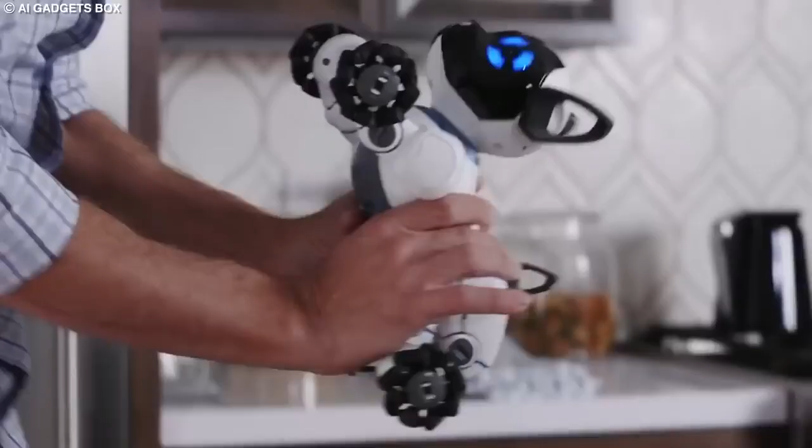Chip is a robot dog designed to be your perfect companion. It can respond to touch, sound, and even your voice. With its AI-powered technology, Chip can learn and recognize your voice, making it even easier to interact with.

This little pup also loves to play and can keep up with even the most active of pet owners. It can perform tricks like rolling over, playing fetch, and it can even dance. Chip is perfect for all ages and makes for a great addition to any family. Its advanced technology and playful personality will have everyone falling in love with it.

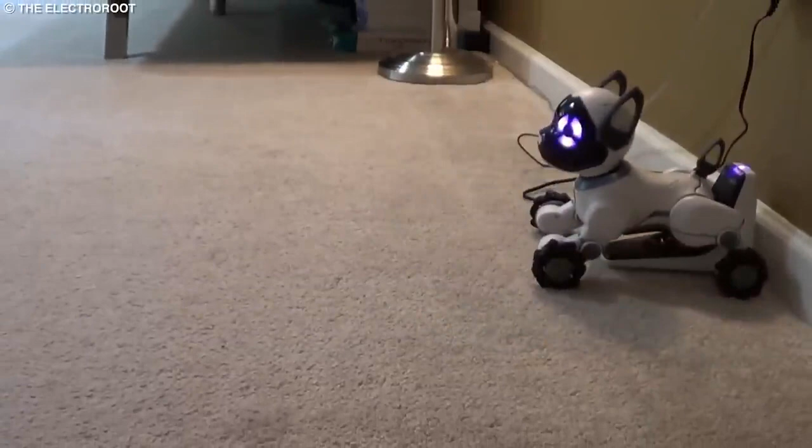And because of its small size, it can go anywhere with you. It's the perfect companion for those who are on the go, whether running errands or going on a road trip. And when it's time to recharge, Chip can easily make its way to its own charging station, where it will rest up and get re-energized for its next adventure.